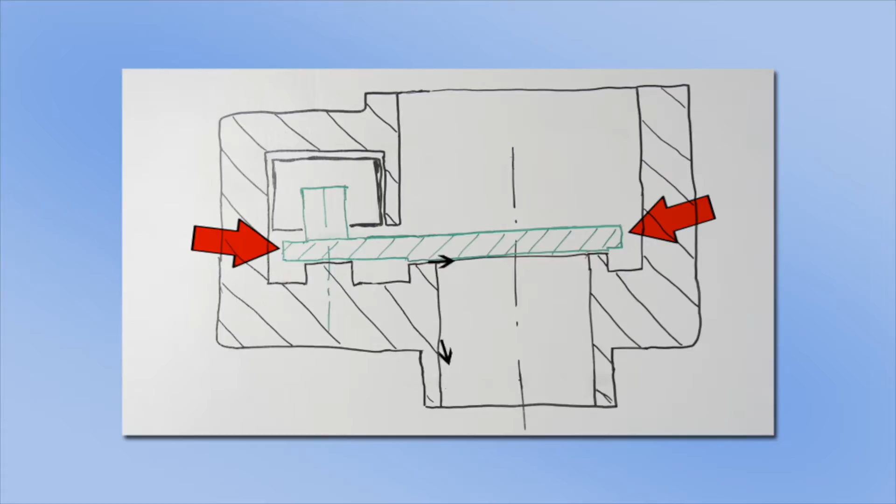That is why, among many other things, Tiberit is a supplier of newly designed valves for coolant circuits in portable HVAC units. And Stanislav just got told that 10 HVAC units were accepted for warranty repair due to malfunction of the valve. As the valve did not close properly, the coolant from the engine was still warming up the heat exchanger, causing hot air coming from the unit when it was supposed to cool the air down.

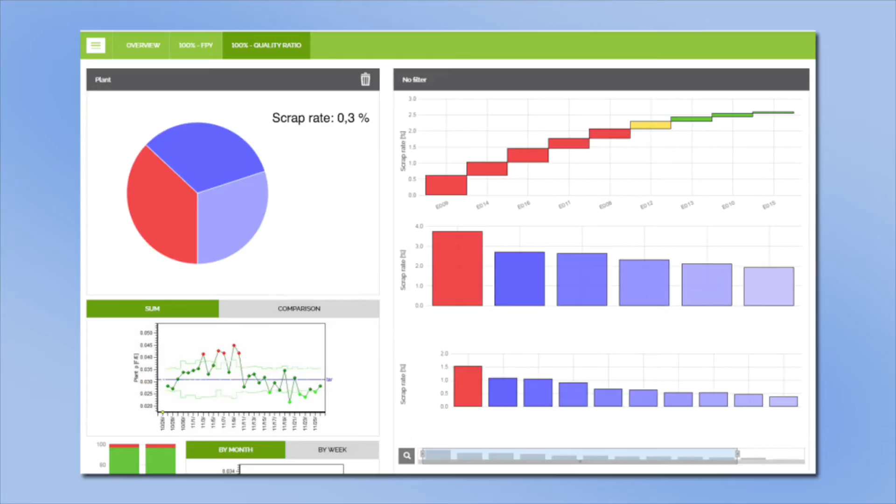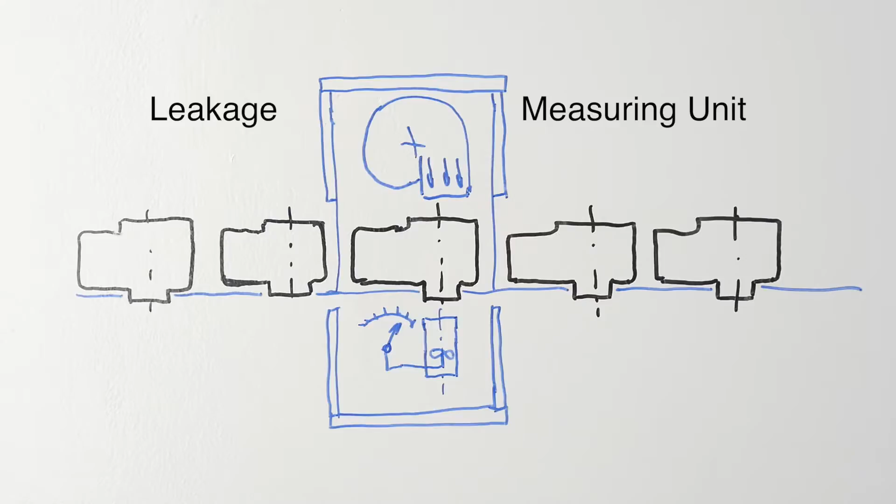The internal scrap rate of the valves was about 0.3% at the leakage test, and as it was a 100% check, none of the leaking parts should have made it all the way to the customer. The leakage measuring unit was, of course, the first that came to mind to blame. Something must be wrong with the fully automated measuring device when it let the leaking units pass.

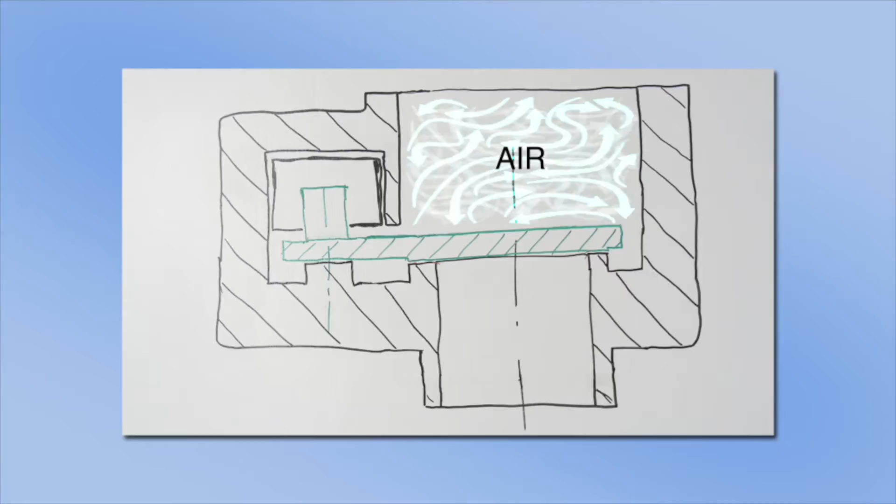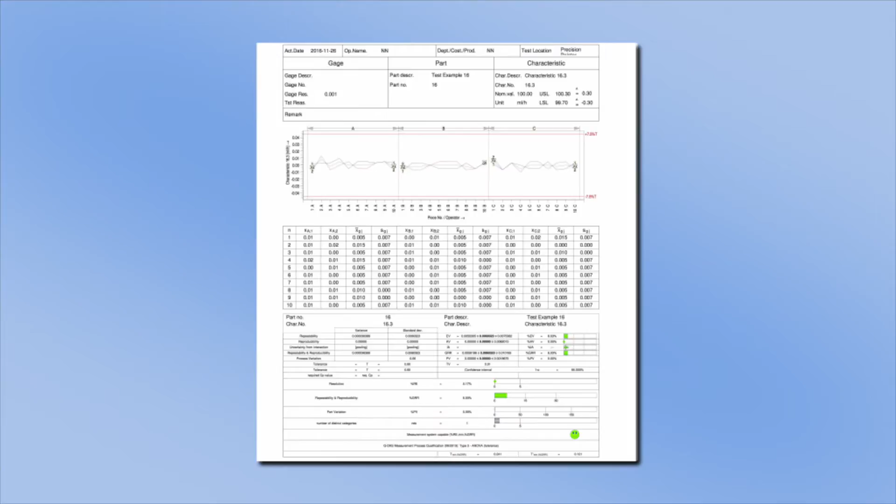The gauge was using air to measure the possible leakage, as it was a reliable and reasonably inexpensive method, time-proven on many past projects. And, as everyone would guess, if it's airtight, it surely must be watertight too. Per the archived gauge reports, the measuring device was what one would find capable. In cases like this, we cannot be careful enough. We should rerun the gauge capability study to see what exactly has changed and what is wrong with it.

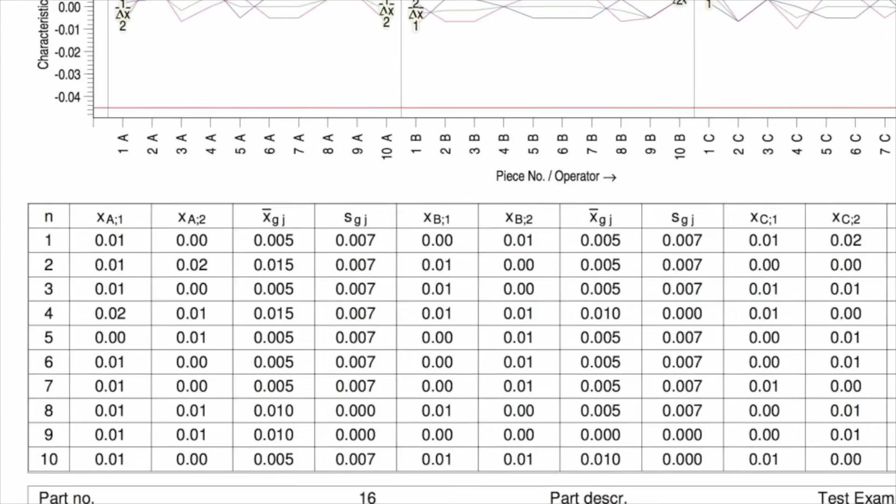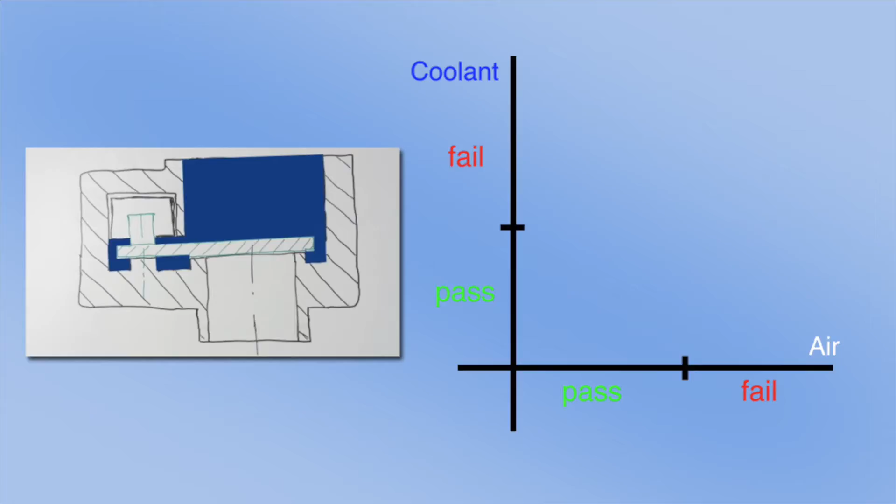To everybody's astonishment, there was nothing wrong with the gauge. It was as good as when it first started in Tiberit. The repeatability and reproducibility all was okay. Could it be that somebody readjusted the pass-fail criteria? The simple experiment with coolant showed that one valve that failed with coolant passed with air.

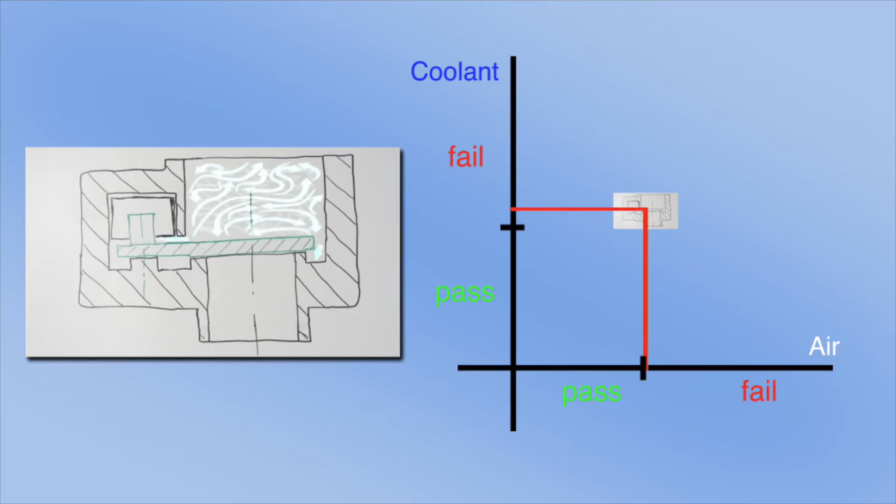Karl Popper once wrote, "Whenever a theory appears to you as the only possible one, take this as a sign that you have neither understood the theory nor the problem which it was intended to solve." And now to your valves. This is a task that must start with the design of experiments.

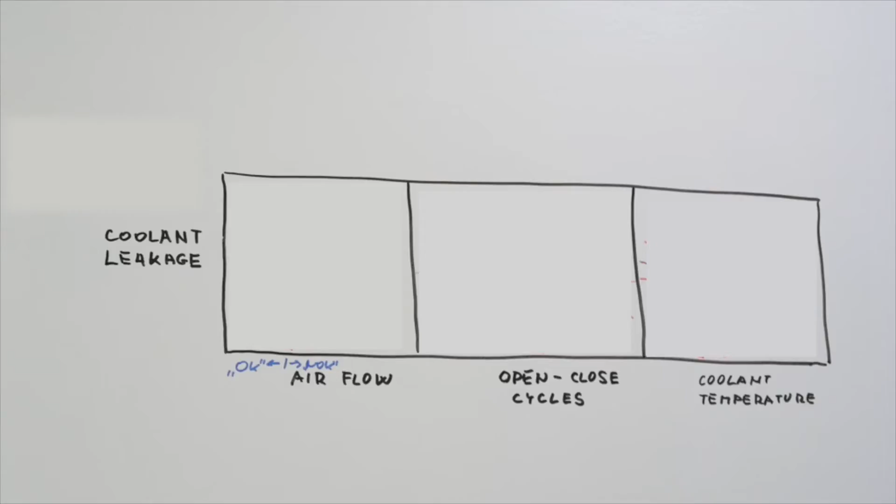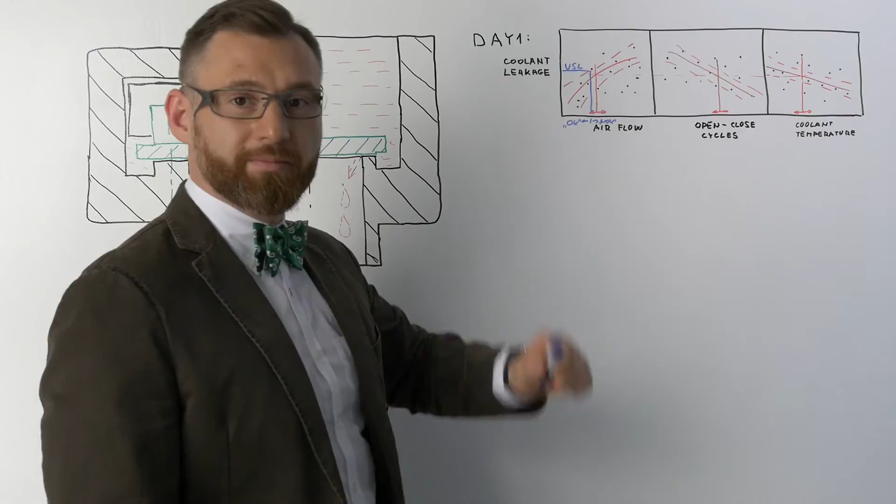The air and the coolant may have different interaction with the tested parts, so it is necessary to take a set of parts and measure it with the air, after several open-close cycles, and at different coolant temperatures. The effort paid off. In one day, sufficient correlation was found to hand over the new criteria. But what could have changed since the gauge was installed? Changing the tolerances must be well verified, and it was quite suspicious to see it changed.

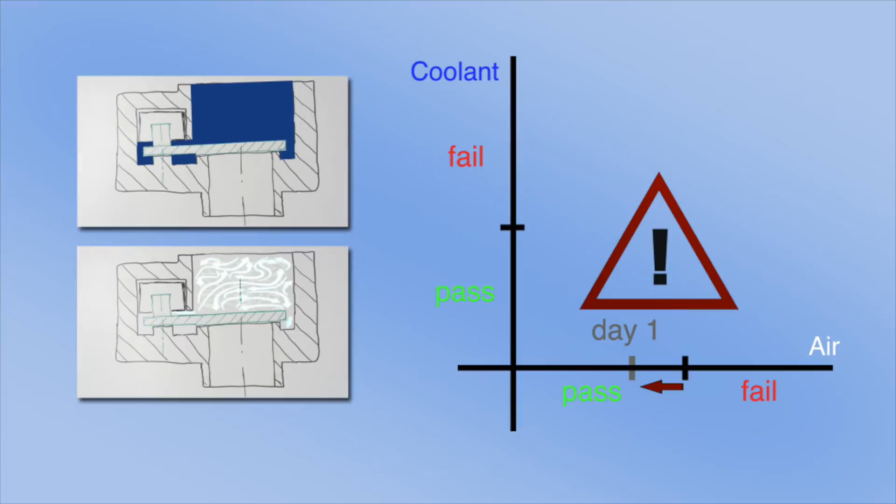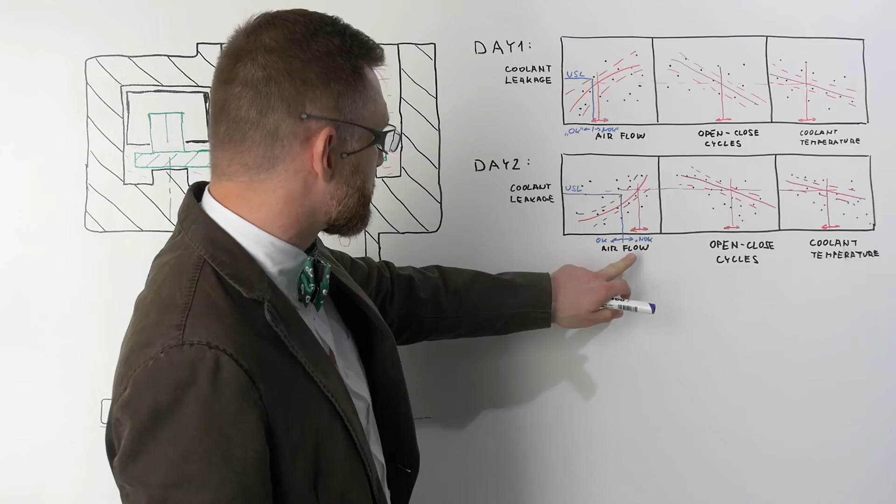And so Jaroslav repeated the experiment the second day, again producing a new pass-fail limit. What no one expected happened. The two experiments resulted in significantly different criteria. Clearly, there was something very strange going on. To have a different model every day does not make any sense, and it only underlines the fact that we do not have any model at all. There must be some other explanation.

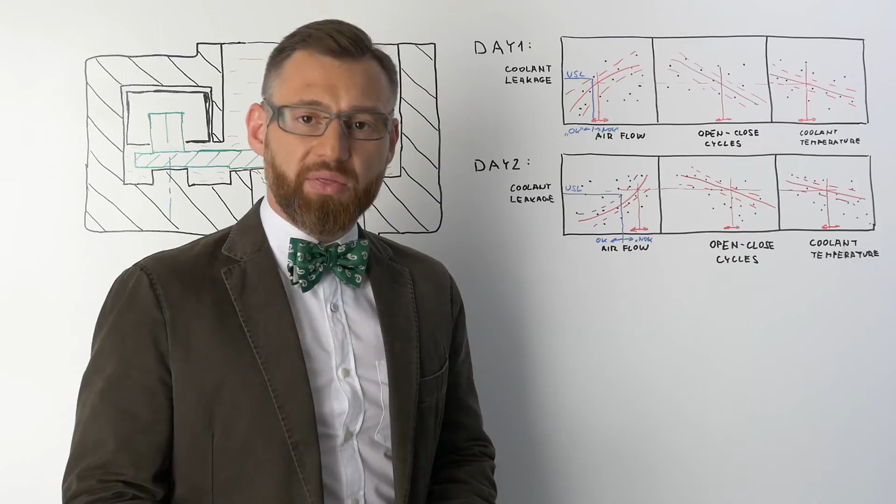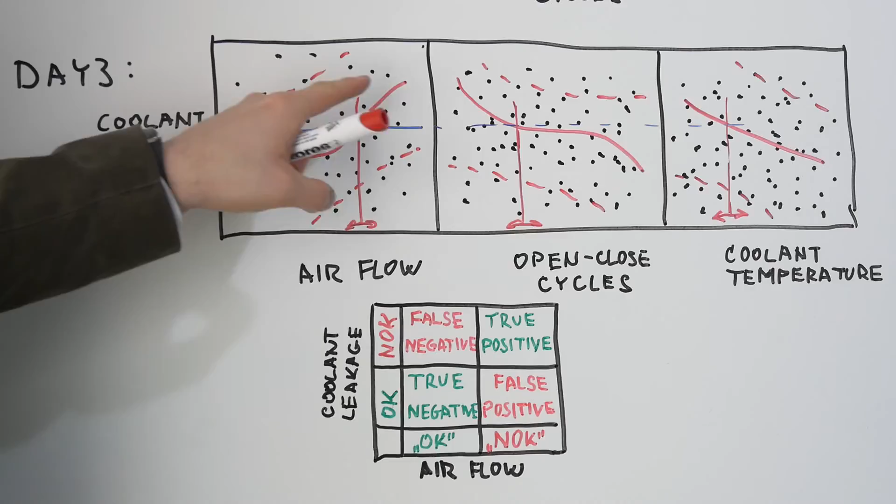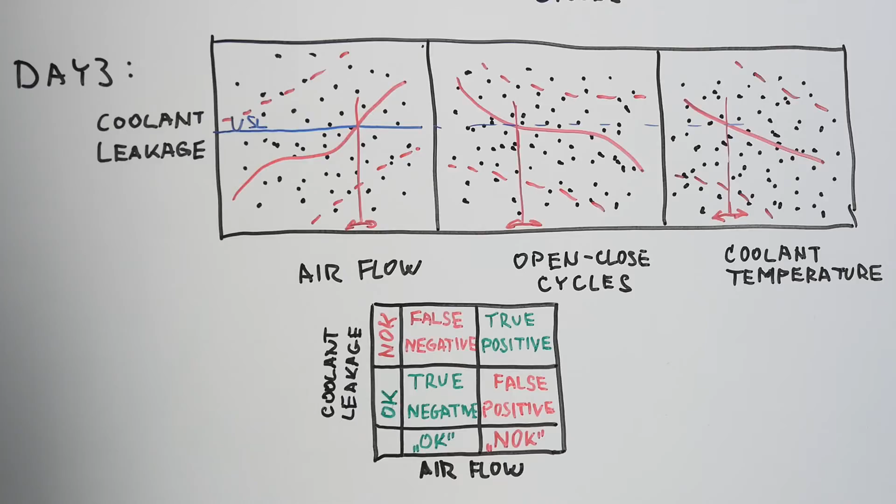And so, a slightly extended experiment was performed the third day. Only after making a meta-analysis on all the collected data, it surfaced that there is not a reliable dependency between the air test and the coolant test. The amount of both the false positive and the false negative results would be far too much for the acceptable risk. So all the air gauges used on similar projects are failures? Let's check the data first.

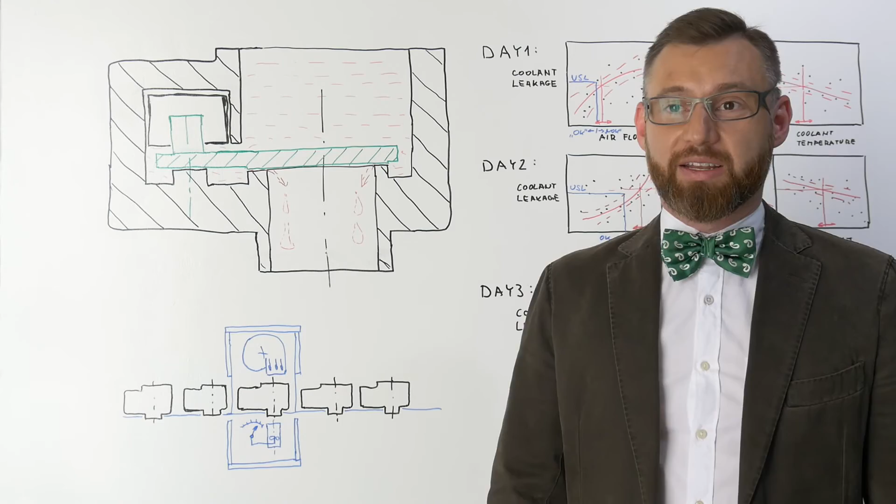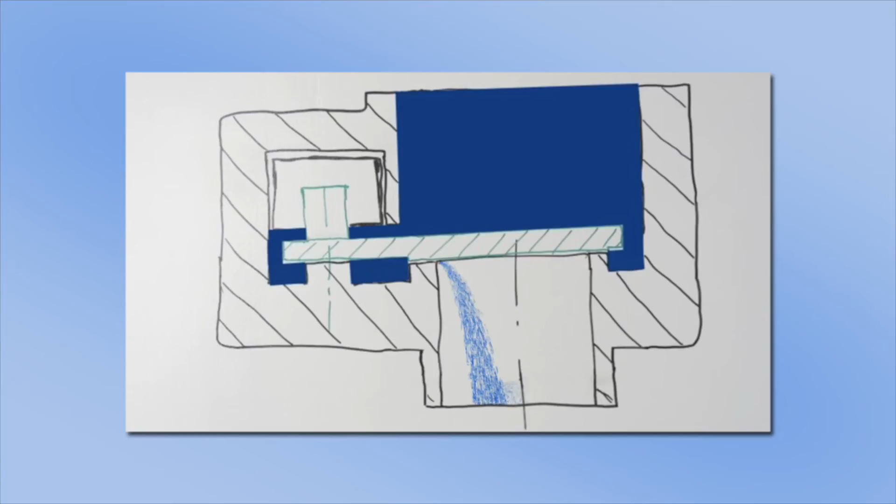Let's do some mining. Soon after reviewing the quality data history, the problem localized only on the one new valve design. The design was using a novel actuator-driven flap that was supposed to cover the orifice. This flap, made of plastic, was particularly sensitive to the passing media, and it behaved very differently in the air and in the coolant. It was different to the degree that parts that were airtight could have been leaking the coolant, and parts that were coolant-tight leaked the air.

To sum it up, the gauge, which was believed to check the tightness, was not actually functioning at all. It was simply sorting the valves to OK and not OK bins without relation to their real function. When starting a new project, one has to make sure that the measurement design relates to the manufactured design.

It was a crucial moment when Jaroslav handed over the displeasing report containing the disturbing findings backed by the collected data. What will Stanislav do? We all know how this usually goes. Such a report must be kept secret, and no one must ever find out, least of all the customer.

But not in Tiberit. Stanislav soon called a kick-off meeting of the task force team, which faced the problem bravely and honestly. Everyone makes mistakes, and Stanislav knew that the customers will always value those who deal with the mistakes more than those who try to hide them. So, one problem was successfully solved, but so many others were to come.